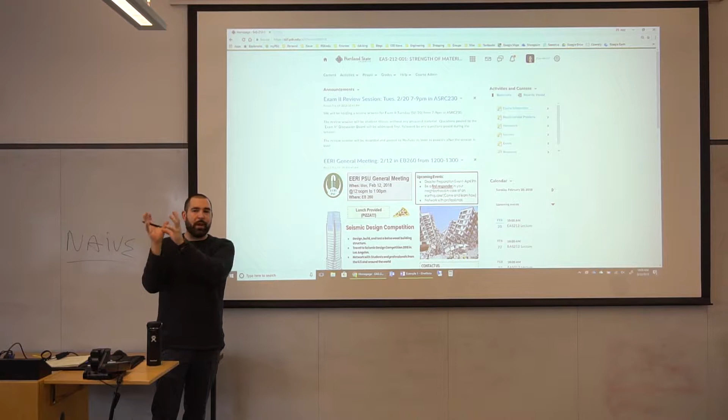Okay, so then beams 3, what were we starting to do in beams 3? Shear — so V and M diagrams, we dealt with the M, now we're dealing with the V. That's what we started with, this kind of long example where we've got a cross section subjected to just some internal shear.

Now, do you think there are many beams that only have shear acting on them? Can you think of any kind of beam where you'd have, at every location, just V and no M? What do you think? Horizontal and pin connected — so like pinned.

So something like this, is that what you're thinking, Dylan? What kind of load would we apply to it? Only a vertical load, so maybe a load like that. I'm still going to get shear, so my shear diagram is going to look like this. Am I going to get a moment as well? Yeah, my moment diagram is going to look like this.

There might be a couple instances where, based on the loading, we have a region of a beam with zero shear, but we'll never have the entire beam have zero shear—we could have regions of zero shear. We could have regions of zero moment, but for a beam subject to any actual loading, there's always going to be some moment, there's always going to be some shear.

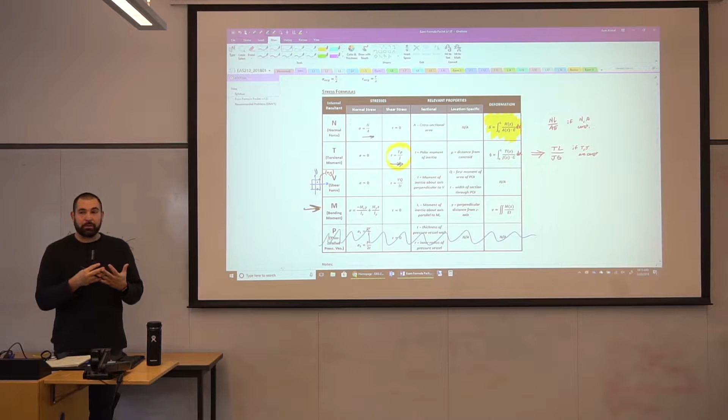And what's the other bit of geometry that we care about when calculating bending stresses? It's M times what over I? Yeah, y.

So whatever my point of interest is, I just need to be able to calculate the distance in the y direction. What's the y coordinate of that point? We can do that with a circle - either it's given to us, or the angle and the radius are given to us, but we can calculate the coordinate of a point on our circle. That's not a big deal.

So we can do moments, the bending stress is due to a moment on a circular cross-section. There's nothing keeping us from doing that. I think one of the recommended problems for this next chapter is going to give you a circular cross-section that you'll have to deal with, so you have all the tools to do that. Just because we've been doing mostly rectangular cross sections doesn't mean you don't have the tools to do it for a circle.

All right, the trickier one's going to be shear stress. So shear stress due to a shear force, what's my equation for that? Let's refresh our memory. Tau due to a shear force equals what? VQ over... right, the shear force times the first moment of area for our point of interest. We'll refresh our memory about that because we talked about it on Tuesday. The moment of inertia, we just talked about that - we know how to do that for a circle. And t.

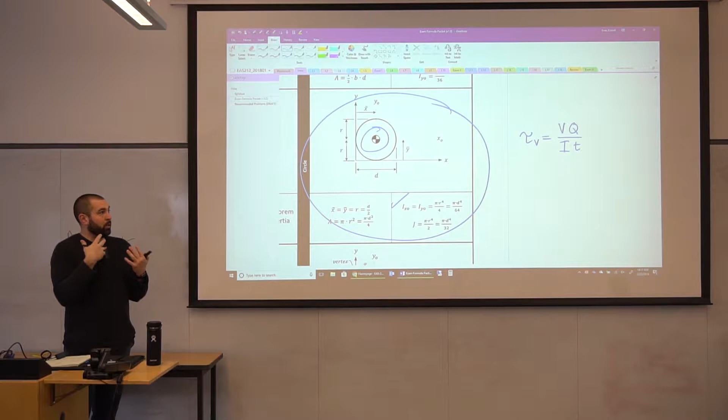Q and t get to be a little tricky when we're talking about points that aren't on the diameter or the top or bottom of the cross section. For a longer homework problem, not something that's going to be on the exam, I could potentially give you something like that. If we're looking at a circle like this, let's look at three different points of interest and figure out how we would deal with it. So here's my neutral axis for all of them. Assume that shear is going vertically downwards.

If my point of interest is the top, I'll just put the shear force on here to make it really clear - we're talking about shear force like this, like this, like this. If my point of interest is on the top, again, we know what V is, we can calculate I, we already talked about that. What is Q going to be at the top? It's 0. Why is it 0? Because if I check, the area above is 0.

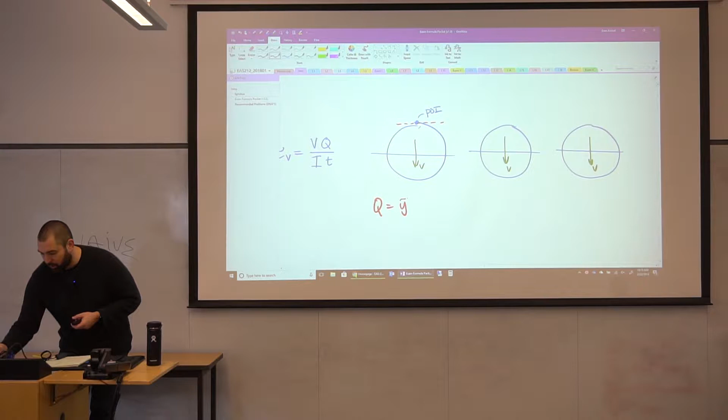If I were to make a cut or draw a line perpendicular to the shear, I'm going to get an area on top and an area on bottom, because Q is simply equal to y bar prime times A prime. This line separates A prime up above, or the option of A prime down below. If I choose all of the area above this point of interest, A prime is 0, right? Y bar prime would be some big number, but the area above that is 0, so that means 0 times some big number is just 0. If I chose everything below this line, A prime is going to be the entire area, right? So why isn't that going to be 0 for Q?

What is y bar prime? How would you describe y bar prime to somebody who's been in this class up until right before last lecture? It's the distance from the centroid of the entire shape to the centroid of A prime - the distance from the neutral axis of the cross section to the centroid of A prime. Inevitably, students are going to say, well, isn't this y bar prime for this area down here if I choose the area down below? And it's not, because it's the centroid of A prime, which would be right there, and the distance from here to the neutral axis is 0. That's why it doesn't matter whether we choose A prime above the point of interest or below - we get the same exact value for Q. In this case, Q is going to be 0 because either A prime is 0 or y bar prime equals 0, depending on which side you choose.

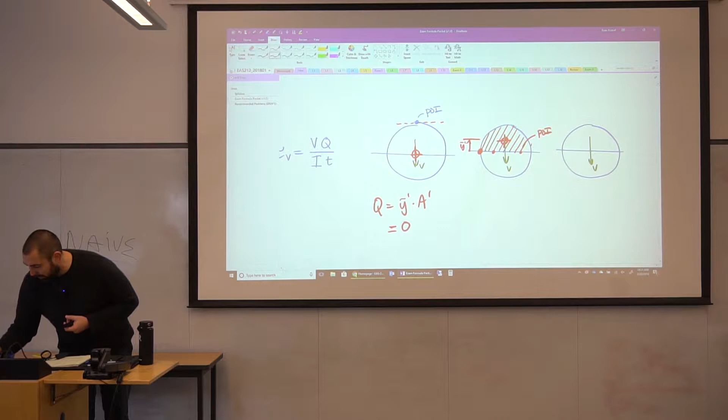But the other relatively easy one to deal with would be at the neutral axis itself. If my point of interest was on the neutral axis, it could be there or here, it doesn't matter, any of these being my point of interest, what is A prime going to look like? A semicircle. It's just going to be exactly a semicircle, either the top half of the circle or the bottom half. So it's going to look like this, and my centroid for that is going to be here, this is y bar prime, and this is A prime.

Now, I can't remember if I gave you that equation in the packet or not. Let's see if we can take a look real quick. Yeah, so for a half circle I would have to give you that information on an exam, like what is the area of a half circle. That's the easier part. And then what is the distance from the neutral axis to the centroid of that semicircle? I don't provide that on the note sheet, so I would give that to you as part of an exam problem. If I gave you that formula for the distance of the centroid and the area of a semicircle, most of you would know the area, but I'd give it to you anyway.

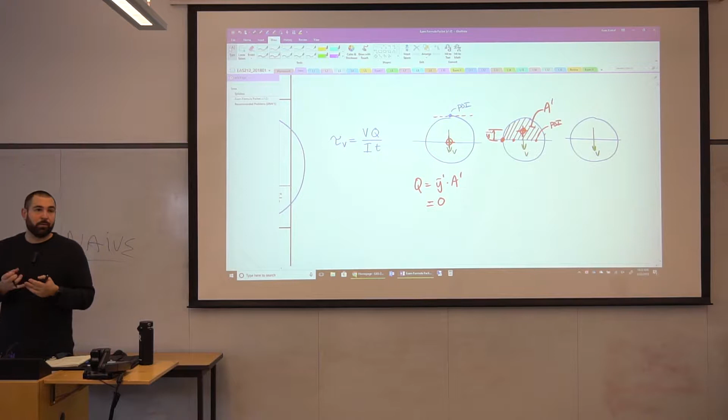If you knew that, then calculating Q for this would be relatively easy, right? It would be the distance from here to the centroid, I'd give you the formula, times this semicircular area. Same idea, so it would be fair game on an exam. I think one of the recommended problems has you doing that as well, but I would have to give you the equations for both the distance of the centroid and the area of the semicircle.

Now, what Musa was saying is, well what if we have a relatively difficult point of interest to deal with? Like this right here, if this was my point of interest, scenario number 3, that's where it gets to be a lot trickier. So here's a line perpendicular to V. If I choose everything up above, this would be my A prime area, and we would have a centroid and then some y bar prime value. This is a little bit trickier.

It's the same thing where we can get a table or a diagram that would tell us, maybe it's defined by the angle of this point relative to the horizontal, maybe you're just given a vertical distance. There are tools that, if I give it to you on a homework assignment, can help figure out what this area is and what that centroidal distance is. And I would provide those to you. That wouldn't be something I give you on an exam. That would be something we'd reserve for a homework problem or something like that.

But this, obviously, no calculations required, I would expect you to know this on an exam. This, if I gave you the equations for the area and the location of the centroid, would be fair game for an exam, and you will see it on a recommended problem. This one, not so much. I wouldn't expect you to do that on an exam, even though I would expect that many of you would be able to figure it out.

Max asked, wouldn't it be easier to just define a function that would allow you to move the point of interest to any y distance? And so that's what the formula that I would give you basically does.

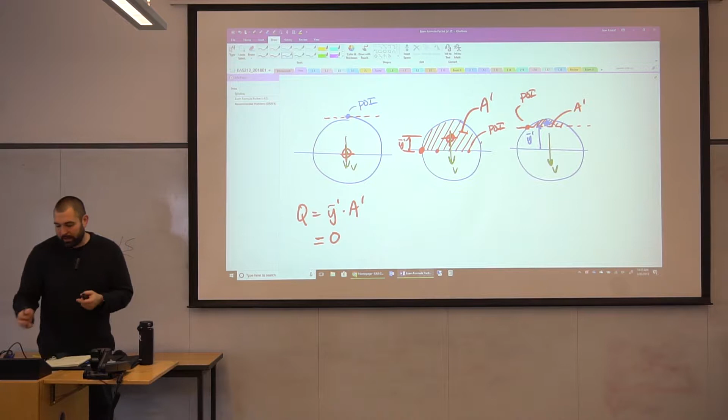But scenario 1, scenario 2, absolutely fair game. So for a circular cross section, it's a great tool to use: throw all of the loading at you, N, V, T, M, and see what the overall stress picture is at a given point. That's what chapter 8.2 is all about, which is the subject of today's lecture. We're going to wrap up shear a little bit, but then talk about what is the total picture of stress at a given point, and whether all of your stresses due to N, T, M, and V add to each other.

Let's get to our table really quick. If I had a circular cross section with an internal normal force, internal torsional moment, internal shear force, and internal bending moment, do all of those stresses add up? Do you just add the values all together? What do you think?

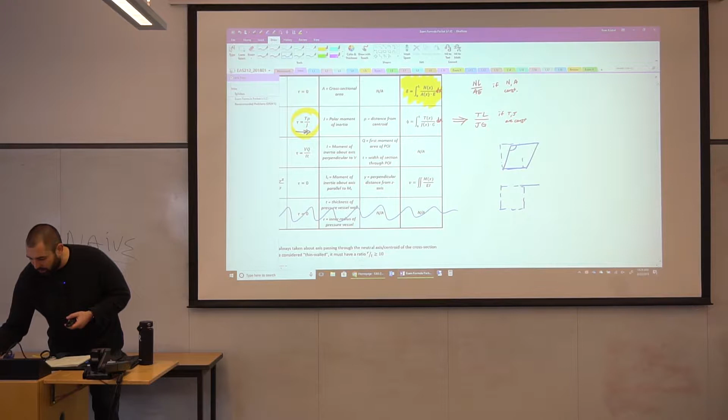The fundamental nature of shear stress and normal stress is completely different. Shear stress is trying to cause right angles to change their angles, changing the angle of each corner of a differential element, whereas normal stress is trying to change the volume of that element. They're doing fundamentally different things. So right off the bat, I know shear stresses and normal stresses are going to be kept separate in terms of how they act on that differential element. We'll see how they flow into each other a bit later, but for this material, shear stress is shear stress, normal stress is normal stress—they don't really intermingle at all.

So right off the bat, I know that the stresses from my normal forces are not going to be added to or subtracted from the stresses from my shear stress due to a torsional moment. But what about the stresses due to a normal force and the stresses due to a bending moment? Are those going to interact with each other? What do you think?

If I was looking at a cross section and I was going to cut a beam, here's my section cut. Let's pretend this has a bending moment applied to it and a normal force applied to it. We didn't quite get to this last time, but we will get to it in more detail right now—bending moment and a normal force. If I were to plot out the stresses due to the normal force, what does it look like? How does the normal stress due to a normal force vary from the top to the bottom of this cross section?

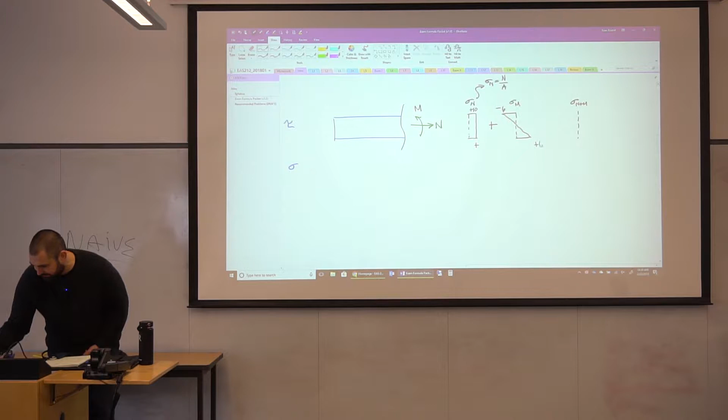I have a positive number here, a negative number here. They counteract each other to some extent. Let's put some numbers on here. I'll say 10 here due to the normal force, negative 6 here due to the bending moment, and positive 6 down at the bottom. It's still going to be positive, but just a net of 4 at the top.

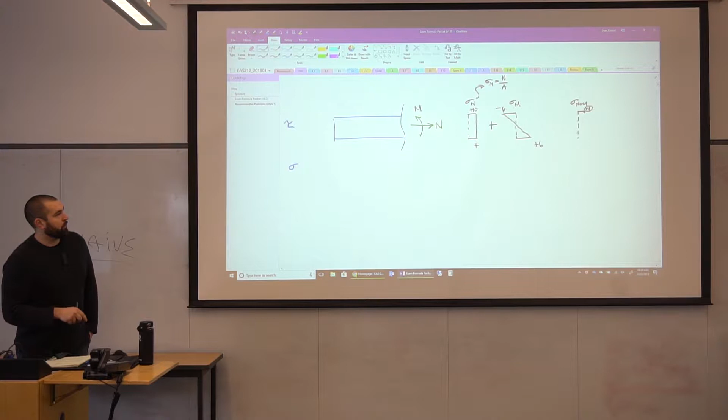So what about at the bottom? I get positive 10 plus positive 6, I get positive 16. I just add the results together.

This is just like what we did with bending moments where we had a Mz and a My. You could look at them completely separately, treat each like a standalone single axis bending moment, then add it to the results from the other moment, just treating it like one moment acting at a time. Then we just add the results at the end.

So that's what we're going to do with normal stresses: figure out, at the extreme locations, what are the values due to normal force and due to bending moment, just add them together. This is one possible distribution we could get. In this case, the effective neutral axis isn't even on the member itself, it would be up here where it would actually pass through zero. We get some interesting behavior with that, but it could potentially look something like this too, where we've moved the effective neutral axis up as well.

This happens all the time. These columns here are primarily axial members, but they get bending moment when there's an earthquake, a big wind gust, stuff like that. These are acting as what we call beam columns. Some of it's going to be stress due to the normal force, like the weight of the building, and some of it's going to be the moment due to a lateral force being applied to it.

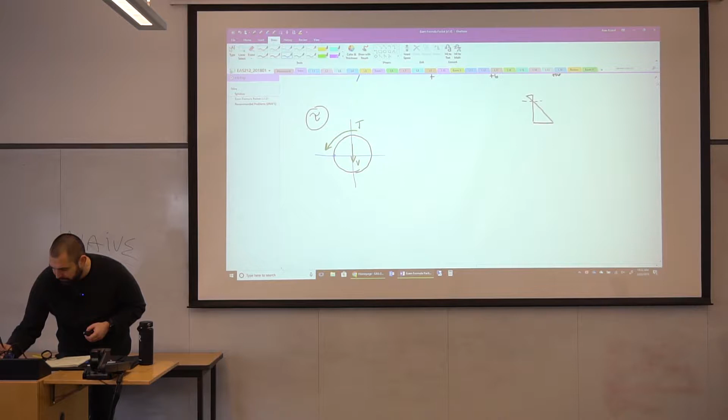we're talking about shear stress now. If I was dealing with a circular cross-section with a shear applied to it and a torsional moment applied to it, let me draw some axes on here really quick, and label a couple different points: A, B, C, and D. If I wanted to look at the shear stress due to both of these internal loadings combined,

I need to do the same thing: wherever they both act at the same location, add them together. But there's a wrinkle with this, because the directionality of the shear stress for a shear force is going to be parallel to the shear force. So at A, B, C, and D, the shear stress just due to the shear force is going in what direction? What direction is V going?

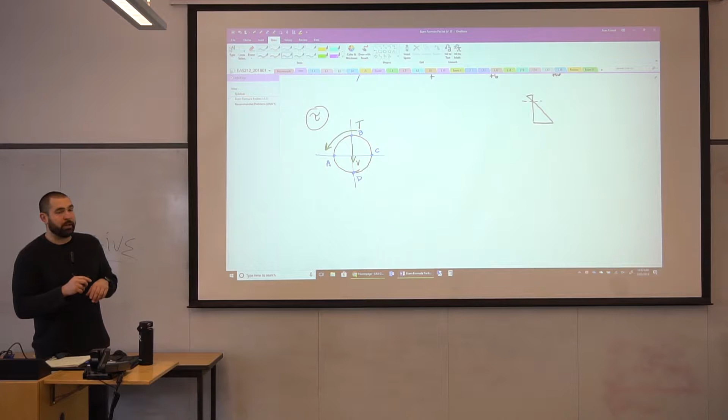Downwards. So let's just break this up: say this is equal to just the effects of the shear force plus just the effects of the torsional moment. Here's the shear force V, here's the torsional moment T, and if I was looking at those same points, let's zoom in a little bit. At point A, I'll show the section facing side of that differential element. This is a 3D element, but we're only looking at the front face, and we'll do the same thing at point B.

We'll show an exaggerated one at each of these cardinal points, and the shear stress is going to be going downwards at every location. Now, I've only drawn it at this point here, at A and at C. And why have I done that?

What's my shear stress going to be up here? Zero, right? VQ over IT, Q equals 0 up at the top. So if I was looking at a point intermediate, let's add an extra point. We'll call it point E.

That shear stress at point E is going to be less than the shear stress at A or C. Let me say that one more time. Because tau equals VQ over IT, the shear stress due to this shear force at B and at D have to be 0. That's where Q equals 0. We already talked about that.

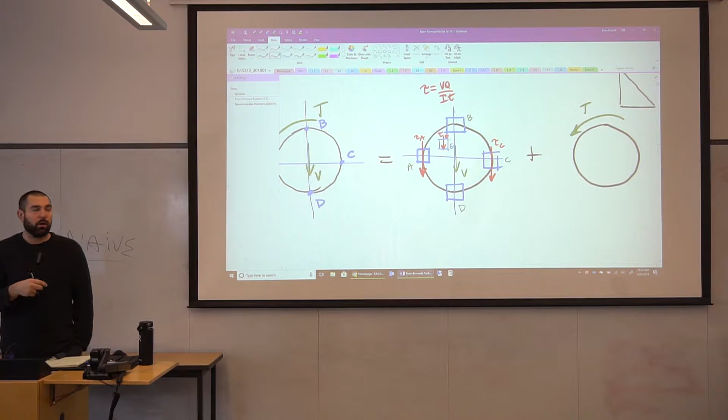Is that going to be the same case for T? What is my equation for the shear stress due to a torsional moment? It's been a while, but it's relevant for the exam on Tuesday as well.

Equals T times, I'll give you that, times something divided by something. T times rho—you can call it C if we're talking about the extreme fiber, like the outer radius—and then divided by J, exactly right, the polar moment of inertia.

But these equations, just like over here, don't tell us exactly what direction those shear stresses are going to be. This equation tells me that the further away I am from the neutral axis, the larger the magnitude is going to be.

So that's helpful. I'm going to look at those same points: A, B, C, and D. We'll even do this intermediate location too, that's a little trickier to deal with. Let's not worry about it quite yet—let's just talk about A, B, C, and D.

Do we always cut horizontally from the point? Cut horizontally from the point—so do you mean the direction of this box? At point A, if I make a cut, it's always going to be horizontal, like there won't be vertical cuts. Are you talking about this box, or just this line right here?

That entire line—oh yeah, so this line just means the neutral axis. It's not really a section cut at all. This is just recognizing the vertical and horizontal axis through the center of the shape. We're not really making a section cut. This box is a differential element kind of cut out of the shape, but don't think of it as a cut. I'm just using these as guides to show the horizontal and vertical axis. That's really all I'm showing.

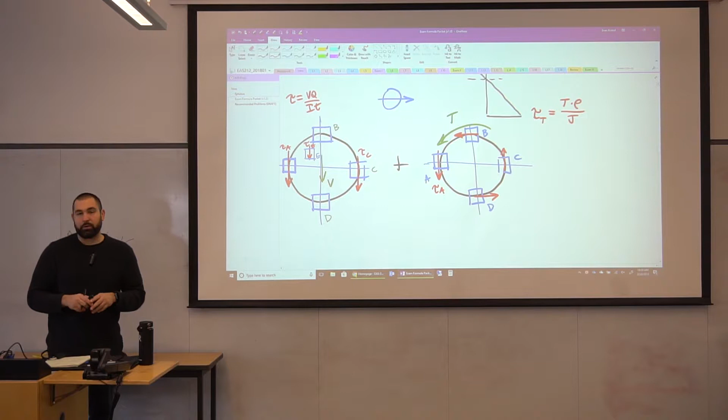Am I going to have zero stress up there just like I had zero stress up here? No. What direction is it going to go at B? To the left. Being consistent with the torque, this is going to be the direction of each of those shear stresses, same direction as T. It's the same kind of idea.

I'm actually going to do an intermediate point right here, I'll call it point E. This one I drew off to the left a little bit. I just want to clean this up to avoid some confusion. Here, it would be going downwards as well. We're just going to have some intermediate point E that's on the vertical axis.

So for this point E, what direction is my shear stress going to be going? Also going to be going left, but what's different about E and B? The magnitude. Why is the magnitude at E less than the magnitude at B? Rho's different, right? So I will have some smaller shear stress, and again there's a linear relationship with distance and the magnitude of the shear stress.

Okay, so now we're starting to visualize how these shear stresses are acting on these differential elements aligned with the cross-sectional face. And so the question is, if I'm adding these together, how do I deal with that?

So here at A, it's relatively easy, right? I have some shear stress here due to the shear force. I have some shear stress here due to the torque. And what's easy about this is that they're both going in the same direction. So let's go ahead and draw out what this is going to look like.

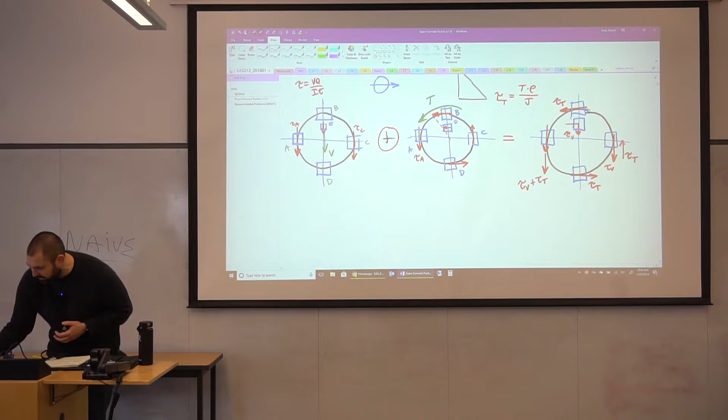And then down at the bottom, we can see that we would only get just the shear stress due to the torque. What about point E? Point E is the trickier one, right? At point E, we have some shear stress going downwards due to the shear force, and we have some shear stress going to the left due to the torque.

How do I deal with that? We could do a vector sum and give the total magnitude. That would be great. Or you can just say, look, this much to the left, this much going downwards, and that would be fine as well too.

But you cannot add them together algebraically. You'd have to do vector addition, Pythagorean theorem, a squared plus b squared square root. That would give you the magnitude of the resultant. But you can't just say, oh, the shear stress due to the torque is 5 ksi, and the shear stress due to the shear force is 10 ksi, so the total is 15. That's not the case because they are acting orthogonal.

So that's a tricky one, a conceptual kind of hiccup, but I think that visualizing what direction the shear stresses are going on the face is really important, and figuring out when can I add them together, when do they counteract each other, when is only one of them acting at a time. That's an important conceptual thing to be able to understand.

So questions about this, how we're adding them together? Yeah, Dylan.

Sure, that's fine. So are beams or other structures ever designed to have torque or shear in the opposite direction that an earthquake will cause?

Well, the tricky thing about earthquakes is that they're cyclical, so it's almost impossible to get different behavior in one direction versus the other. When we do structural analysis for seismic events, we almost always get the plus or minus value of stress, moment, or axial force due to the earthquake. We have to say, okay, here's our dead load, and then we add 10 kips for seismic, or subtract 10 kips for seismic. Same thing with shear, same thing with torsion. It's very uncommon to design things to have a non-symmetric response to an earthquake. I haven't worked on anything that does. I could imagine maybe there would be some structures where you might do that, but almost all the time we just basically add the seismic effects or subtract them. That's almost always how we deal with them. Does that answer your question?

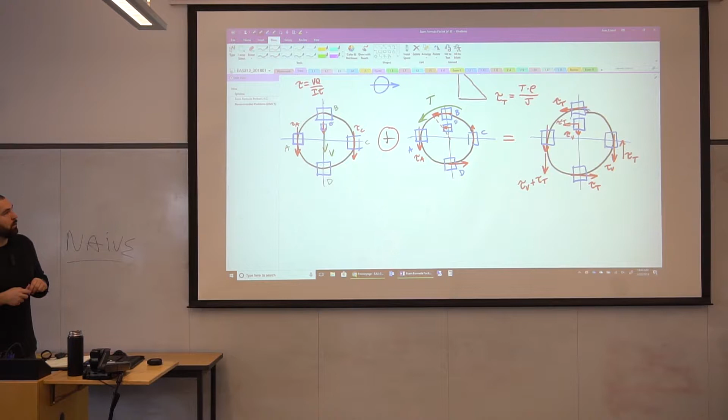Yeah, Max? Is the distribution of stress due to the bending moment in that diagram implying it's linear, or would it end up being second order? Which one are you talking about, down here? Yeah, so this would be just a torsional moment. This has a linear relationship because rho is the only property that matters, and rho increases linearly as we go out to the further distance from the centroid. So this is a linear distribution. Does that answer it? Okay, great.

Okay, so let's take a step back. This is the big picture of what we're going to be talking about today. I want to get through the rest of the example talking about shear stress, because Q inevitably is going to throw everybody for a loop at some point. So I want to go back and make sure we really understand what we're talking about when calculating Q - Q being the first moment of area on either side of the point of interest. Let's go back to that example from lecture 9 and refresh our memory. We'll get through most of this, take a break, and then transition over to combined loading.

So we have a singly symmetric cross section - an unbalanced I-beam where the top flange is wider than the bottom flange. This is a common design practice to have it unbalanced, because we might have bridges or buildings that mostly see a positive moment, meaning most of the compression is up at the top. We don't get a lot of compression down below. So based on the stress profile, we can tailor our cross section to meet that stress profile. This is pretty common - it just makes it a little more difficult to calculate Q and to calculate I.

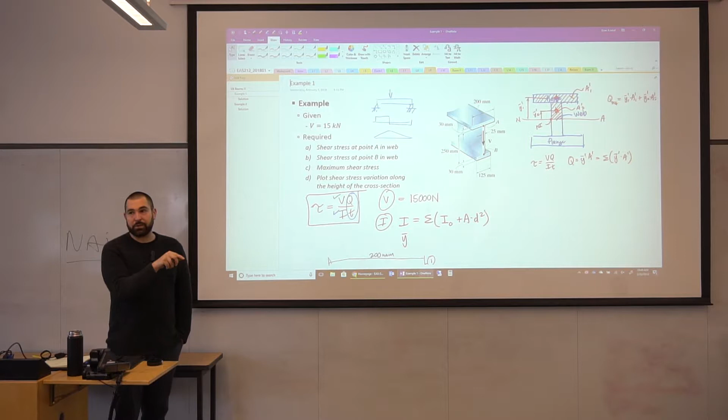D is the distance from the overall centroid of the cross section, which you've already calculated as the y bar value. We also call this the neutral axis for our purposes. D is the distance from that location to the centroid of each individual area. So from the neutral axis up to the centroid of the top flange, that's D for shape 1. We do that for each shape, square it, multiply by the area, and that's how we get the total moment of inertia.

We couldn't do any tricks with this shape, like breaking it into two shapes with the same centroid to avoid an A D squared term. This is one where we really have to look at it and have a non-zero value for all six terms. Because we have three different shapes, each gets two terms.

That's moment of inertia, and we have videos online that can help with that too. Shear is given to us in this problem, and we talked about I. So the two things we need to talk about are Q and T. Q has a formula: Q equals y bar prime times A prime. Y bar prime is the distance from the neutral axis to the centroid of the A prime area, and A prime is the area on either side of the point of interest.

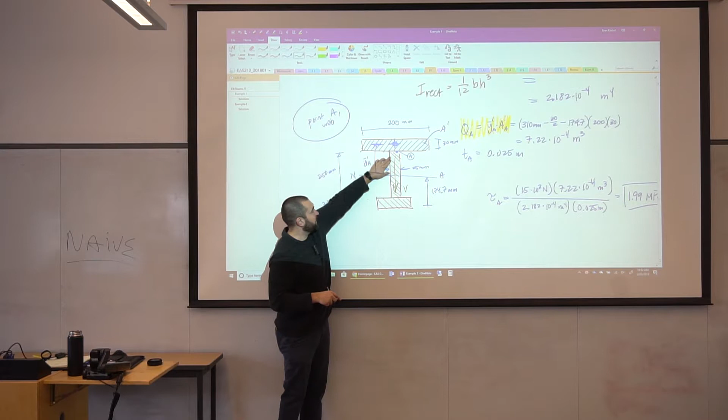Above, because I only have one rectangle — this is another common conceptual issue I see. Some students, when they choose everything below, say you only have this rectangle here to deal with. What's wrong about that? They say all they have to deal with if they choose everything below is just this here.

No — it's everything below, even stuff past the neutral axis. It's this inverted T shape, the entire rest of the shape below that point of interest. A lot of students cut it short, and that's not the right way to do it. You need to consider everything above or everything below.

It's a similar conceptual issue with section cuts. A lot of times students take a section cut and then only keep some of what's on one side of that cut, whereas you need to keep everything, including reactions, forces, and geometry.

With that in mind, if I keep everything up above, I need to calculate the area A prime for rectangles — that's super simple. If we were dealing with a circle, I would give you a formula for calculating the area above a specific point, which is something between a semicircle and zero. But we're mostly dealing with triangles, rectangles, stuff like that — area is pretty easy, and the centroid of that area for simple shapes is also relatively easy.

For rectangles, it's half the height. For triangles, it's one-third of the height from the wide portion. You can look that up in the table in your formula packet too. Either way, y bar prime is to the centroid of the area. Inevitably, I'll see people say y is just the distance to the point of interest.

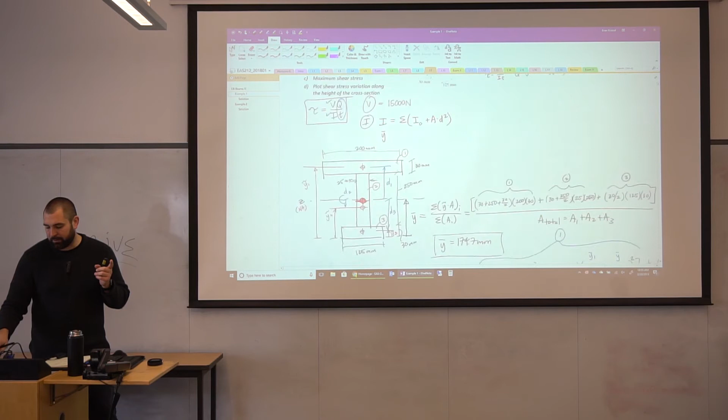At point A, do I use 200 or do I use 25? There's a hint in the problem statement that tells us which one to use, and we'll talk about that, then also talk about what if it wasn't specific. So what about the problem statement for sub-requirement A tells us that we need to use the 25 millimeter width?

Web, right? We talked about this—the vertical component parallel to the shear force is called the web. Even if we had a box section like this, it's the same thing. If V was going down this way, the vertical components parallel to V, both of these collectively would be called the web, or the webs. So here it says the shear stress at point A in the web. The web is the narrow vertical component, which means the narrow component with the 25 millimeter width.

What if it just said give me the shear stress at point A, and omitted the 'in web' component of that request? What would you do? You would just give the answer for both. Because at that point, it jumps immediately from some small value to a larger value as we go from the top down. As we go from the top down, we start at 0, it increases, and there's kind of a parabolic shape to that increase.

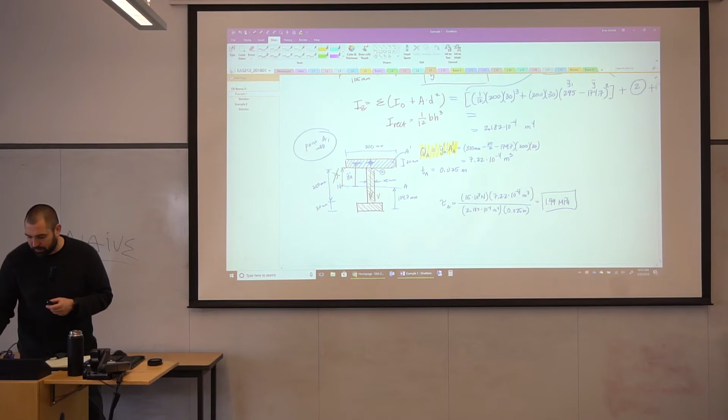As soon as we get to A and jump across that interface from flange to web, T drops down quite a bit—it goes from 200 to 25, right? So we're talking about a factor of 8 decreasing, and the stress is increasing immediately by a factor of 8 there. I think we've plotted out for this shape what the shear stress distribution looks like—actually maybe that was just in the lecture itself.

This is the kind of shear stress distribution we'll get: 0 at the top because Q equals 0, 0 at the bottom because Q equals 0. The maximum value occurs at the neutral axis because there I have Q max and T min at the same point. But at the interface between the flange and the web, we have a discontinuity where it jumps up by a factor of whatever the ratio of flange width to web width is. So if it's not clear—if it just says at this point right here, and it could be in the flange or the web—just give both values to be sure. But keep in mind it is transitioning immediately at that point.

Okay, back to the example. The only other thing I want to talk about with respect to this example is the maximum shear stress. The process for the shear stress at point B is exactly the same as it was for point A. We draw a line perpendicular to V, and then choose everything above or everything below that line for A prime. For point B, do you want to keep everything below for A prime, or everything above? Probably below—it won't change your final answer, but I think it makes more sense to use this for your A prime of point B area. But you'll get the exact same answer if you choose the T shape up above. Other than that, it's the same exact procedure as for point A.

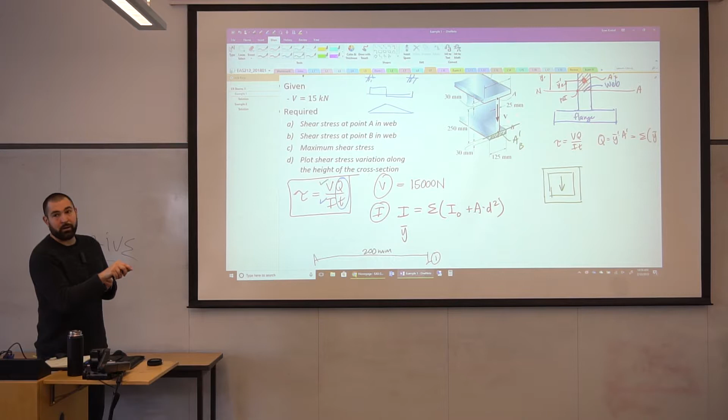And we do, because here we found out that the distance of the neutral axis is around 100 or 100 and something millimeters. Either way, it's in the web, and everywhere in the web I have T min, so I know that at the neutral axis is where we care about for the maximum shear stress.

And all that I want to talk about for this is what does Q look like for that calculation. So here we'll call it tau max, and we know it's going to be at the neutral axis because we have Q max and T min at the same time. Okay, so let's get to that subpart right there.

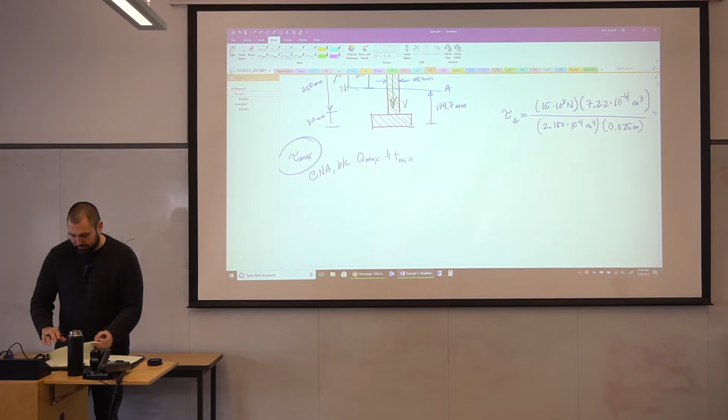So I'm just going to choose everything above the neutral axis for this. We know the distance from the bottom of the shape to the neutral axis, and then so I can split it here, then keep everything above the T shape up here, or keep everything below the T shape down below. It doesn't really make a difference either way. And so I'm going to make a new diagram that has the top flange and it has the portion of the web up until the neutral axis, because that's where my point of interest is.

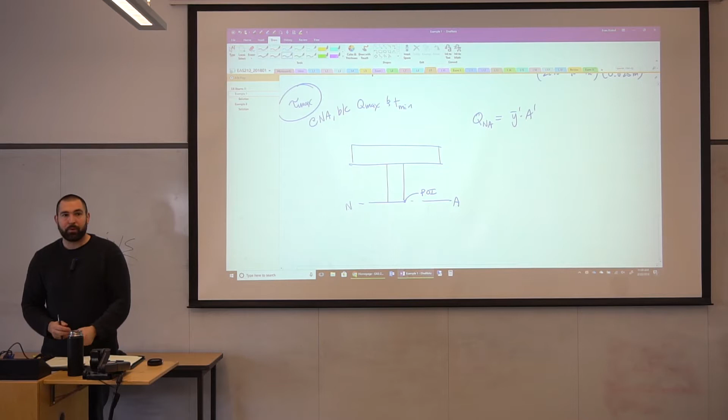Here's my point of interest. And so I've drawn basically a line through the point of interest, which is coincident with the neutral axis, and now everything above is what I'm going to use for Q. So Q at the neutral axis is the same equation as Q for anywhere else. It is y bar prime times A prime. But here, I'm really looking at two different discrete shapes. We've got a top flange and we've got a portion of the web.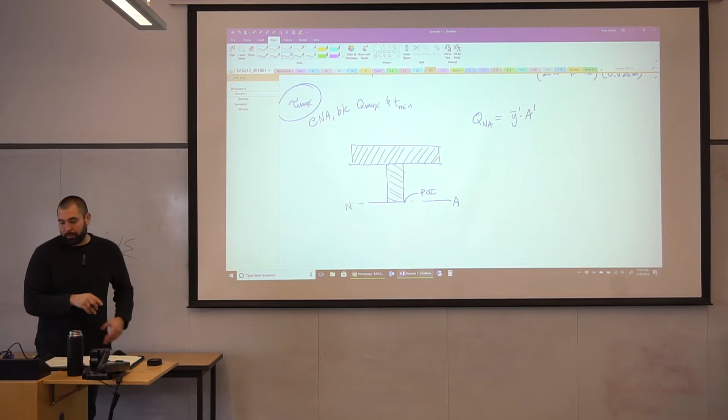You could find the total area for both of these shapes combined, and you could find the centroid of both of them combined, because as it stands right now, they each have their own local centroid, but there's also an overall centroid for these as well too. So if this is y bar prime, we'll just call it total, we could find the actual centroid of both these shapes combined. I'll call it y bar prime total, and then multiply it times the total area. So I could just say this is y bar prime total times a prime total.

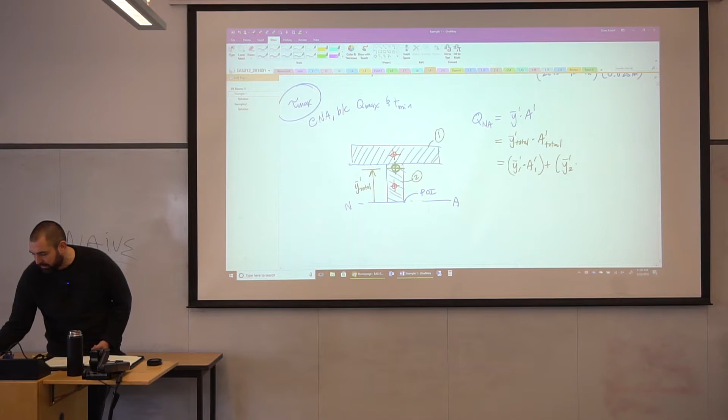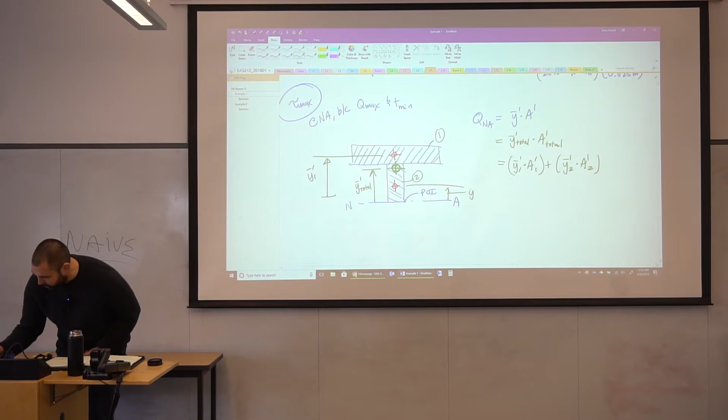But that's a pain. I don't want to have to figure out the centroid of these if I don't have to. And fortunately, you don't have to, because all you would have to do, if this is shape 1, if this is shape 2, all that you would have to do is y bar prime for shape 1 times a prime of shape 1, plus y bar prime of shape 2 times a prime of shape 2. You don't need to go through the intermediate step of calculating the overall centroid, because this equation here, this is y bar prime 1, and this here is y bar prime 2. You can just do them individually, add them together, there's no difference.

So just trying to save you some work. Either way works, but here you have some intermediate calculations to calculate y bar prime total and a prime total, which is kind of a pain. Okay, so any questions about this? We're just making the shape for a prime a little bit more complex, but we can again do the same thing of dividing and conquering that as well too.

And we've already talked about subpart D, which is what is the shape of the shear stress diagram. We talked about that in the lecture slides itself, and that is, it's going to look exactly like this.

So one question I do have, and this is more conceptual, this isn't something that I'm necessarily going to put on an exam, but how could I get, like, what is the relationship between V and the area of this shear stress diagram?

Or in other words, when we were looking at bending stresses and we knew what the stress distribution was for the top flange and the bottom flange, we could calculate how much force each of those individual elements were exhibiting just by multiplying the stress times the area, the average stress times the area.

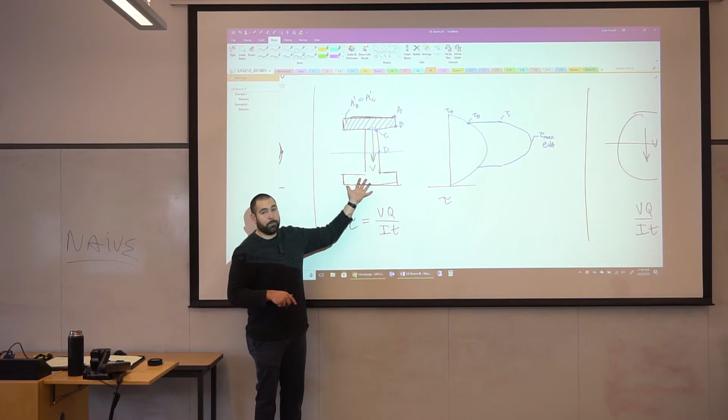It's the same thing here. If you think of this as a 3D stress distribution, if I were to take these distances and plot them out on top of this shape, coming out of the page, with this being the side view and this the front view, combining these into a three-dimensional representation of the stresses, that volume altogether has a length in and out of the page in terms of KSI, and the projection on the cross section would be inches squared. If you took the volume, that's KSI times inches squared, which would be kips, and that would be equal to this shear force exactly.

So think of it that way: if we were to plot out the stress profile onto the face of the cross section, making a 3D element out of it, the depth in and out of the page is like stress. On the page itself, the cross section, we're looking at area. Multiply those together, get the volume. That is the actual resultant force, whether it's a shear force or a moment, anything like that. That's a good way to think about it, maybe in a more spatial way.

All right, any wrap-up questions about how we go about the process of going through a shear stress calculation?

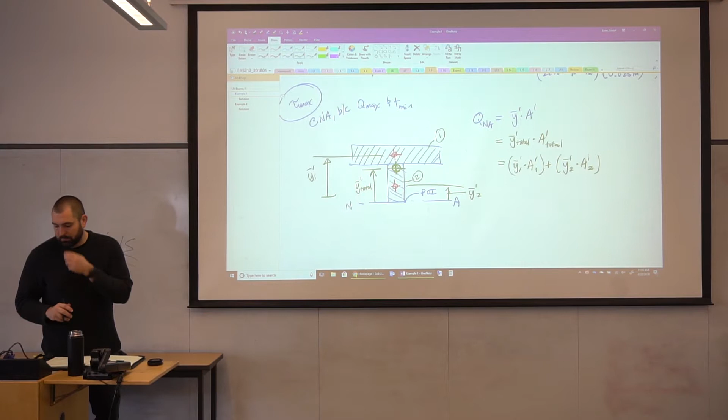Yeah, Max, I just wanted to clarify, when calculating Q at the neutral axis, you're doing the summation of y-bar prime times A prime for the total, or A prime for each? So A prime 1 would be the area just of shape 1, and A prime 2 would be the area just of shape 2. A prime total is simply equal to A prime 1 plus A prime 2. But if you're breaking it up with separate y-bar primes, it's just times the area of shape 1, area of shape 2.

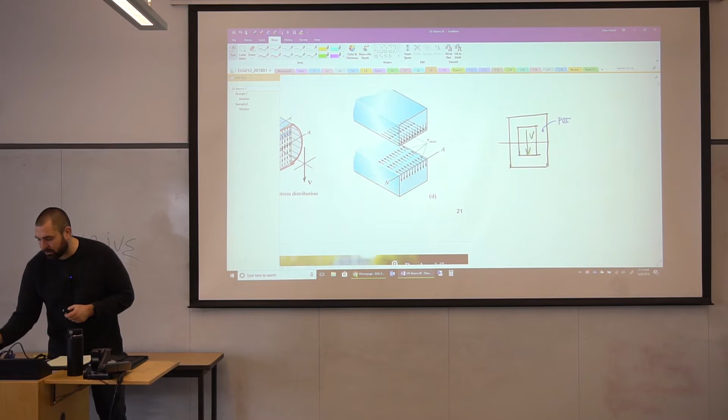The other question that came up over the break that I thought was good is, well, what if I have a box section like this? I'm still trying to calculate the shear stress at my point of interest, but if tau equals VQ over IT, what could maybe throw you for a loop if we're looking at this point of interest?

Right, I'm still going to do the same thing for A prime. I'll draw a line perpendicular to V. I can choose all the area above or below. So even though A prime now is like either one positive shape and one negative shape, or you could look at it as 3 individual positive shapes, calculating Q is not really going to throw us for a loop. But T, yeah.

So is T going to be this width, or both of them combined?

It's going to be both combined. It is the width of the cross section at the point of interest, and the width is the combined width all the way.

One of the sections that we're skipping has to do with what's called shear flow, which would be, well, what if I was putting nails in to attach, or welding, like this point here and this point here?

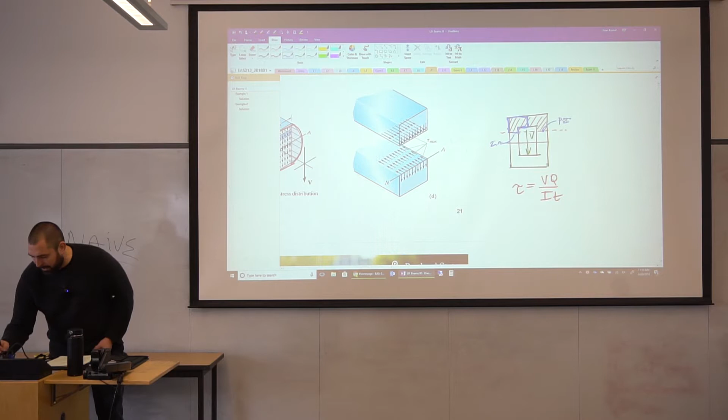Oftentimes what we would do is we would kind of cut this area in half. If I were to simply cut this area in half and say half of this area is being held on by this interface down here, let's just call it 2 inches. And then the other half of the area is being held on by this other interface on the right-hand side, that's also 2 inches wide.

If I choose T to be 2 inches, it all works out in the wash, because my A prime area associated with this width is half as much. So I can either do the total area with a width connected of 4 inches, or I could do half of the area with a width connected of 2 inches. And because one is in the numerator, the other is in the denominator, the ratio is the same.

But if you're doing the total area, it would be the total width, even if there's gaps in it. Whatever width crosses that line that you draw perpendicular to V, all of that combined is T. All right, any follow-up questions about that?

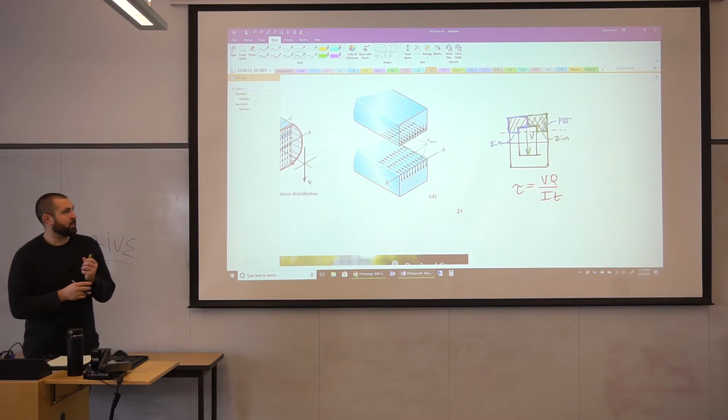Okay, so let's talk about just really quickly the things that we're skipping over that I'm going to provide some extra credit for. Beams 4 talks about shear flow, and I just alluded to it a second ago. I just want to give you a 5-minute synopsis of it.

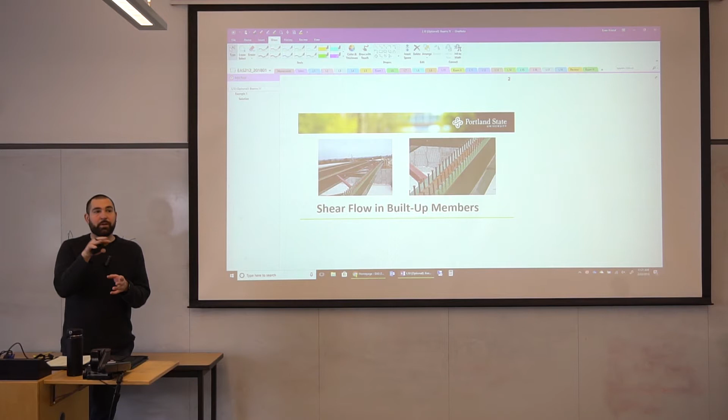When we build a cross section, it is very common to have it made up of different materials or different parts that are attached at some point. If you're familiar with residential framing, a lot of the floor joists nowadays have a fir top piece to deal with moment, an oriented strand board, kind of a crappy plywood web, and then at the bottom a higher quality fir bottom flange. These are attached either by some combination of glue or nailing, maybe one or the other. But the point is they're attached to each other.

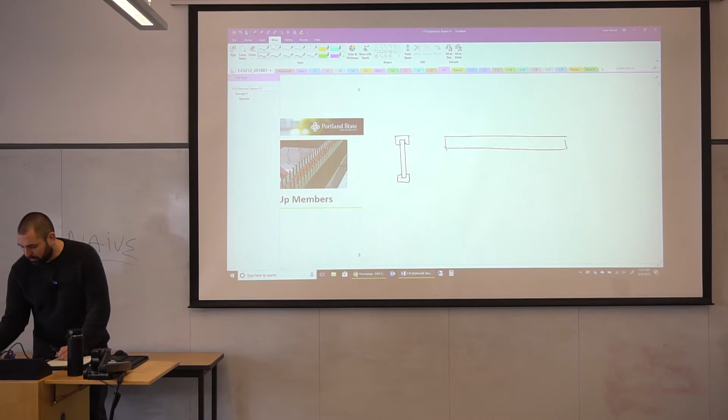Now, if this was a beam that I was trying to design to carry some sort of distributed load, point load, whatever else, it's going to be subjected to a shear force and a bending moment. When we usually think about the shear stress on this, we're often conceptualizing just the shear stress on this cross-sectional face, like the shear stress going up or down.

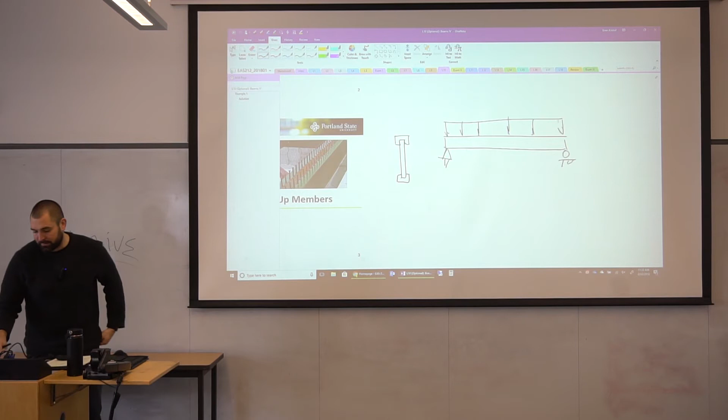But due to the complementary property of shear, what other direction is the shear stress going? Yeah, in and out of the page. And what that does is it creates a force in and out of the page that's differential on this element and the element that is connected to it. So as I apply a shear force to this, that web is going to want to move longitudinally versus that top flange. You can see this in practice easily by looking at—where to go?

We've got a nice example of this, and it might even be in lecture 9. Let me just jump back, because I think it's valuable to see—as soon as you see it, you're going to say, oh yeah, I get that intuitively, that makes sense.

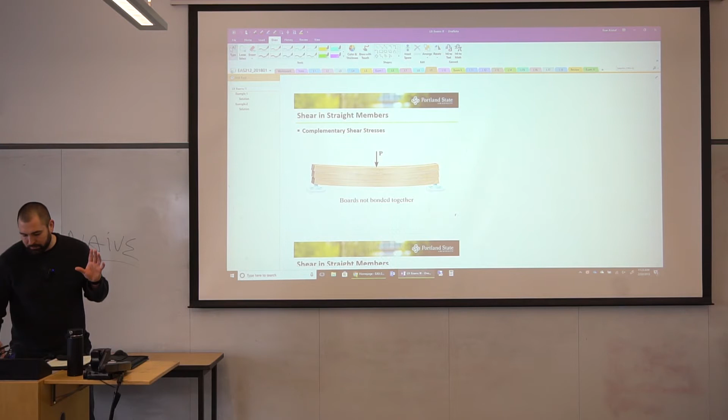If we have 3 boards stacked on top of each other, think of them as frictionless boards. If they start out exactly the same length, perfectly stacked on top of each other, they're just going to look like one big rectangle, and all of the ends will line up and everything's perfectly square. As soon as I put a load on top of them, what happens at the ends?

They slide relative to each other. That is caused by a longitudinal shear stress. It's about each of these acting as independent beams where the top gets shorter, the bottom gets longer, and that difference, if these are free to slide relative to each other, is a longitudinal shear stress causing that.

Now, if we don't want that to happen, it's for good reason—we get a lot better structural performance if, instead of being 3 individual separate beams, these all act together as one cohesive cross-section. Because here, if I were to calculate the moment of inertia of this, it would just be the moment of inertia of this, plus the moment of inertia of this, plus the moment of inertia of that.

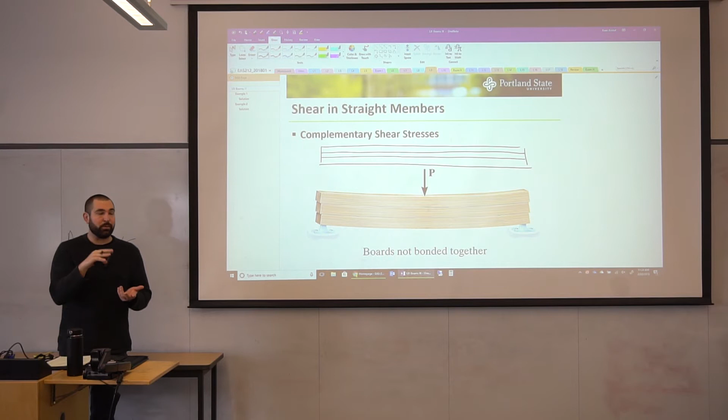No AD squared term at all, just 3 times 1/12 base times height cubed. But if we attach them, if we bond them, then all of the ends still line up. If we were to glue all of these together, all the ends line up, and now they act as one complete cross-section, and we get beam action where the moment of inertia now is not just 3 times the moment of inertia of one of them, it's a lot bigger than that. It has that AD squared term value now.

Now the difference is that we have glue here, but the question you're going to have is: how strong does that glue need to be? Or if we're nailing this at multiple different locations, what is the demand on that nail, or how many nails do I need to put in there?

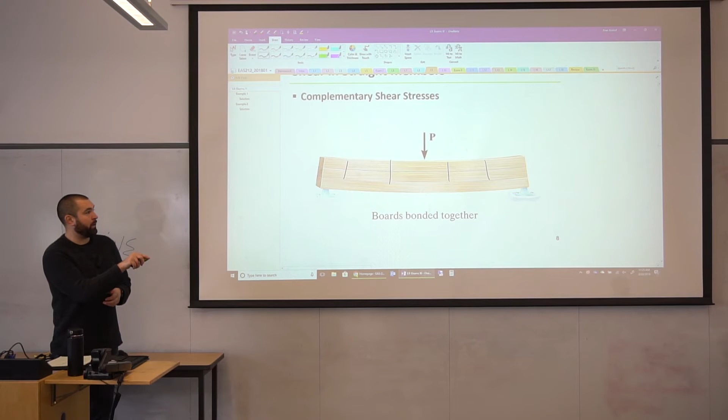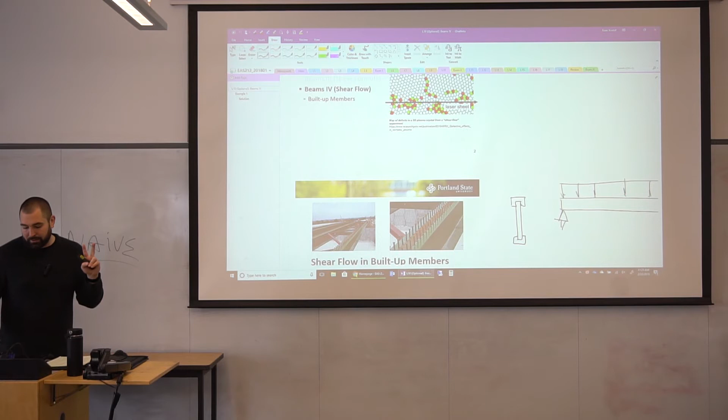That's fundamentally still a shear stress investigation, but we call it shear flow, and there are some specific applications of it, whether we're talking about glue or discrete fasteners like nails or staples or welds. But the reason we're going to skip over this is, number one, I never learned this in my strength of materials class - I learned it in my design classes later on, which is generally when it comes to the forefront. And two, because the equation is so similar to what we've already done for shear stress itself.

Shear flow, for whatever reason, Hibbeler calls it lowercase q. So now we deal with q and Q, which is kind of a pain, but we can deal with it. Lowercase q is called shear flow, and it's equal to V times Q over I. What's missing? T. So what are my units going to be here?

If I'm missing a linear dimension in the denominator, instead of being like kips per square inch, what am I going to get? Kips per inch. Which means this will give me the demand in terms of force per foot in and out of the page, or force per meter in and out of the page that I have to resist. And so that's the difference about shear flow - we're clearly talking about the forces in and out of the page, longitudinal to the beam.

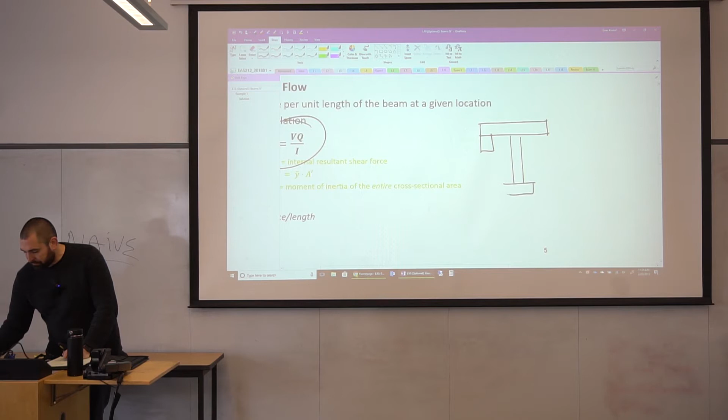Now Q is just very slightly different, because when we talk about a cross section, we're focusing on how many points of attachment there are. So if I had a cross section that looked like this, with 5 different rectangles - I've added some little stubs here to maybe increase the moment of inertia - we're focusing on just putting nails in between all of these here. If I want to know what the shear flow is along this interface right here, my A prime area, Q is still calculated the same, Y bar prime times A prime, but A prime now is the area that is attached to the rest of the cross section.

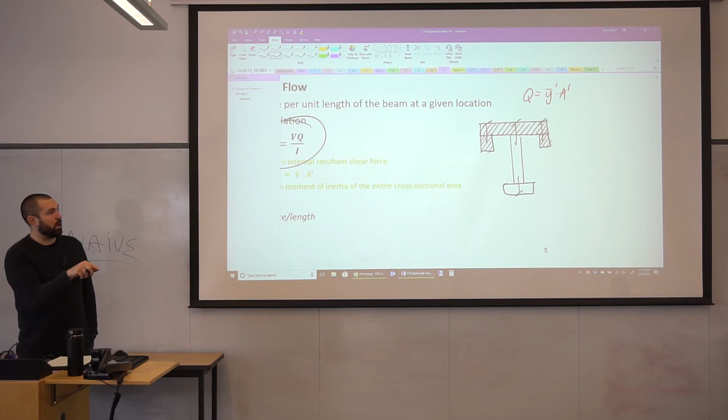Meaning I can either choose everything on either side of this joint. Now, when I say everything on either side of that joint, I mean everything attached to it on either side, which is a little bit different. If I choose everything above, it's not only going to be just this top flange, it's also going to include these little stubs as well. It's everything on either side. Whereas if we're doing the shear stress at this point, I would do a horizontal line. With shear flow, all that I'm doing is saying everything on one side or the other of this, and you just follow how everything's connected to each other.

The other trick about this is: what if we had 2 different points of attachment, like the top here? If I was interested in figuring out what is the demand on this interface, the nailing between this stub and the rest of the top flange, I could either choose this area right there for A prime, or I could choose this area over here for A prime, but then divide it by the 2 different points of attachment. So this is a little bit of extra bookkeeping, but fundamentally Q is calculated essentially the same way.

A prime is just slightly different, and then you have to keep track of how many points are attaching - that helps you define A prime. So it's really just a slight extension of VQ over IT, which is why you have the tools to be able to do this. Just a couple tweaks to the methodology, and then you'd be completely well versed in it.

So we're going to skip over this, but it does help when it comes to attaching different pieces and figuring out what is that demand. Dylan asks: if it was only attached at that center piece and those little edge squares were already there and didn't need nails, would you still include them? Yes, you would still include them. So if this is all monolithic top flange, with no other pieces attached, you would still include the entire top flange for the shear flow at that web to flange connection.

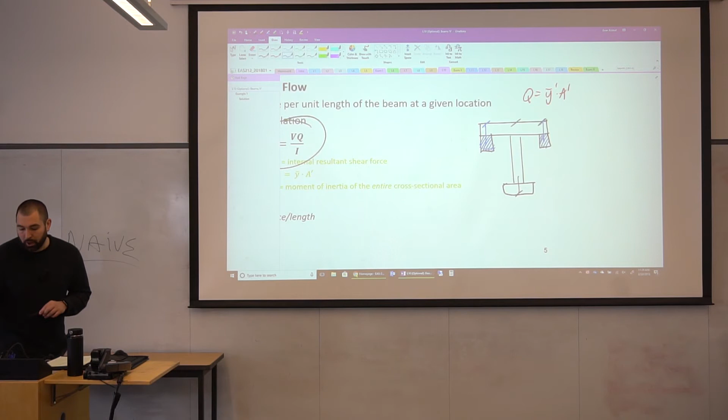Max asks: would we be using the complementary V in the X direction in this case? No, great question. V here is still the transverse, vertical shear force. This is simply causing a shear stress in that longitudinal direction as well, and that's what's driving the desire of the flange and web to move this way. But the actual demand V you get from your shear and moment diagram is the same exact V you'd use for shear stress.

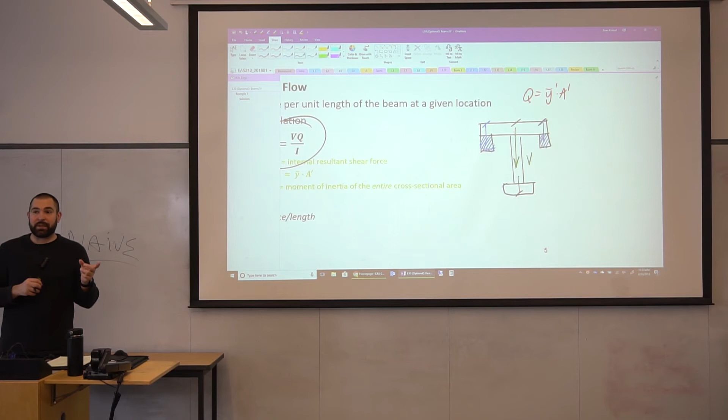Now, there are extensions of this shear flow into topics we wouldn't even get to even if we had time in the class, things like shear center. All of our cross sections that we deal with so far for shear have to be symmetric about the axis that V is acting in, and we won't deal with any that aren't, but I do want to give you a heads up.

When we have a cross section that's not symmetric, let's say like a channel, and I have some shear force applied to it like this, now the section is not symmetric about the application of the shear force, which we can't deal with. But what's the issue if this shear force is applied at like the geometric center of this shape? What ends up happening is if it's not going through what's called the shear center, it causes a torque on this cross section as well.

Being able to calculate how far we are from the shear center is an extension of this shear flow concept, where we plot out how the shear flow varies, not just the connections, but everywhere in the cross section. We plot it out, then find the centroid of that shear flow area, which tells us where the actual shear center is, which is not the geometric center, just to be clear. That's another more advanced topic. They kind of go hand in hand, and we always have to cut short, usually between shear flow and shear center, but this time we're just cutting short of shear flow.

But I will give you a lecture online and give you some extra credit if you want to investigate that a little bit further. Yeah, Max?

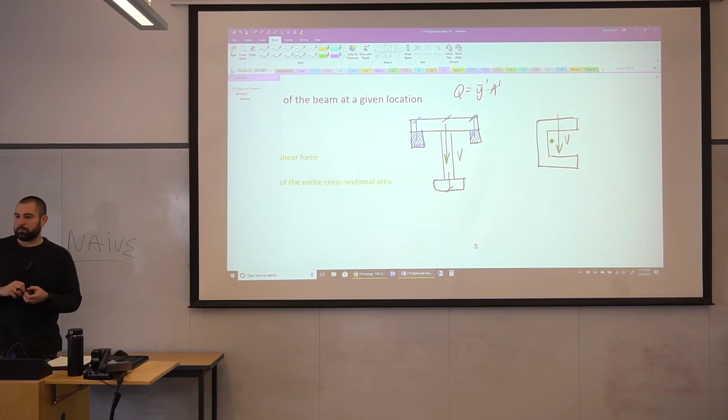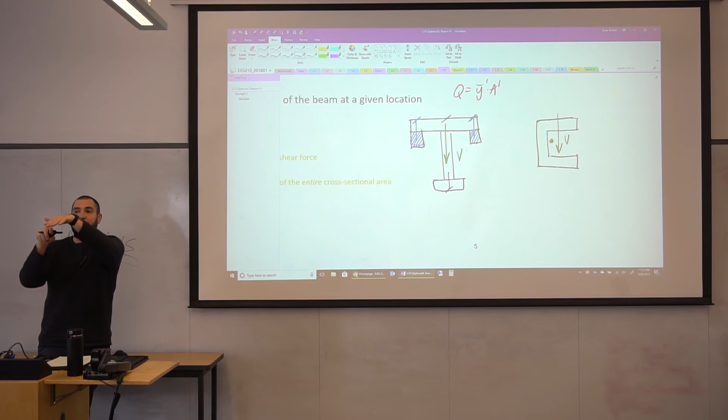Max asks: just to clarify, using this method, is it going to define the shear flow in the x direction? In the longitudinal direction, exactly right. The forces we care about here are going in and out of the page, trying to load this nail right here. It's trying to make that break this way. It doesn't care how much this little block weighs or whether it's going to fall off. It's not loading the nail in axial like tension. It's loading it this way, like the nail is going to break side to side.

So that's one thing. Like I said, I'll provide some supplemental material, an opportunity for some extra credit, but we're not going to cover it for the exams or the recommended problems. I've already updated the recommended problems for that.

The other thing that we're going to skip over, which again is a very quick calculation, is thin-walled pressure vessels. All I want to do is give you a quick heads up about what this looks like. We use a lot of pressure vessels for liquid storage, gas storage, things like that. We need to figure out how thick that metal or plastic or whatever else needs to be. And not surprisingly, if I have a differential pressure of the inside of the vessel versus the outside, I'm going to get some stress in whatever that wall is.

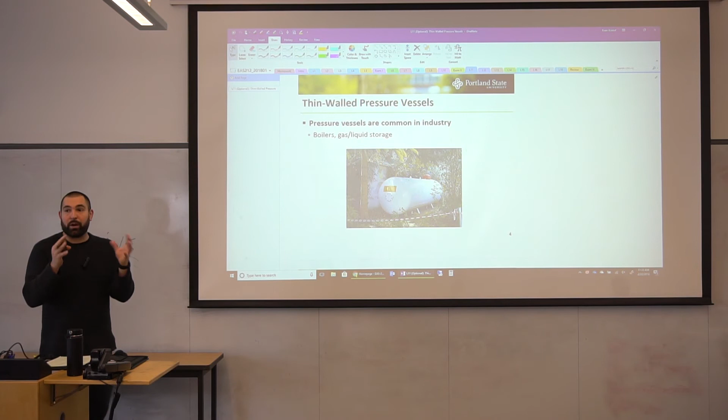All that we do is split it up into two different shapes: cylindrical vessels and spherical vessels, and that's the only two that we get to deal with. And we're limited to just thin-walled pressure vessels, meaning the inner radius divided by the thickness has to be greater than or equal to 10.

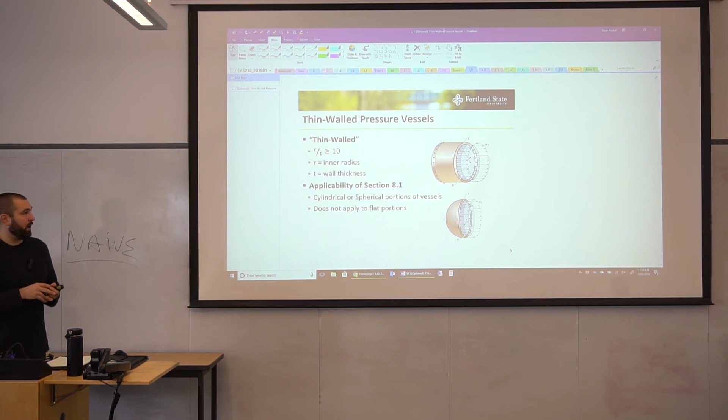There are thick-walled pressure vessels. We don't have the equations to deal with that in our textbook, but they do exist. This is a really short section in your book, and basically there's only two different stresses that we care about.

One is called a hoop stress, which is going transverse to the longitudinal axis of the member. It's basically going in the circumferential direction around the cylinder. And the other one is called longitudinal, going parallel to the longitudinal axis of the vessel.

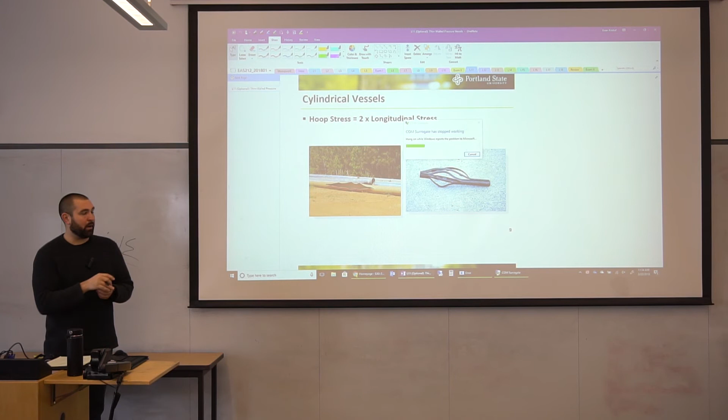Spherical vessels, it's the same idea. The only difference is that instead of getting a hoop stress and a longitudinal stress, the only stress that we get is the same in every direction for a sphere. We call it sigma 2. And the equations are relatively straightforward to apply.

It's the pressure times the radius, either divided by twice the thickness or 1 times the thickness. They're exactly the same whether it's hoop or spherical. It's just we divide by 2t or we divide by t. Just internal pressure, internal radius, and thickness are all the things that you need.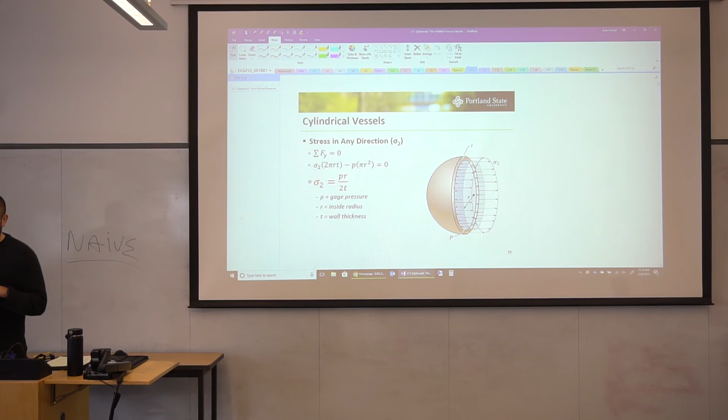So it's really quick to apply. It doesn't really deserve a whole lecture unto itself, and we're going to skip over that as well too. Just like the other material, I'll provide a quick small homework assignment for some extra credit for this as well too. But your book doesn't devote a lot of time. We're not going to spend a lot of time on it either. Actually, we're gonna spend like no time on it other than this, just to kind of introduce it.

But where this takes us is the topic that we were talking about at the beginning of class, which is combined loading. We know how to deal with the normal force and what kind of stresses it produces, torsional moment from chapter 5 and the stresses it produces, bending moment from chapter 6 and the stresses that it produces, and now shear forces and the stresses it produces from chapter 7.

What happens when we have multiple loadings on the cross-section acting at the same time? That's what chapter 8.2 in your book is all about. And that's a really good review of all the loadings that we've dealt with before, all together. We have a lot of structures that have multiple internal resultants acting at the same time. We don't live in a vacuum where we only get N or T or M or V acting at the same time.

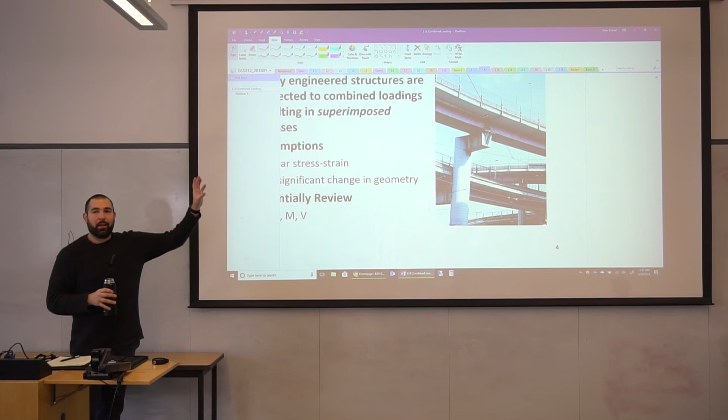So what about this bridge-like column right here? This bridge column, right, most bridges are near and dear to my heart. Is that bridge column subject to N, T, M, or V? Or some combination? What do you think? What is going to cause a normal force on a cross-section of that column?

Dead load, live load, vertical forces transferred from the bridge deck are going to make their way into that column, and it's going to be a normal force because it's perpendicular to a cross-section through it. Great, N is pretty easy.

M - why am I going to get M? Yeah, I have some eccentricity. If I have a force going down like that, there's some eccentricity there. That's going to cause a moment, a bending moment in that column as well too. I could have an earthquake, right, that applies let's say a horizontal force, and that's going to cause a moment as well too.

Am I going to get any torsion possibly on that? Yeah, if the bridge superstructure itself is expanding or contracting, thermal effects, stuff like that, I could get a force parallel to the deck that causes some torsional moment because of the eccentricity to the longitudinal axis, the vertical axis of the column. So I could get a torque there as well too.

This force here is also going to cause a shear force on the column as well. Wind loading, the load of a vehicle braking, the wind load on a vehicle - these are all loads that we have to care about.

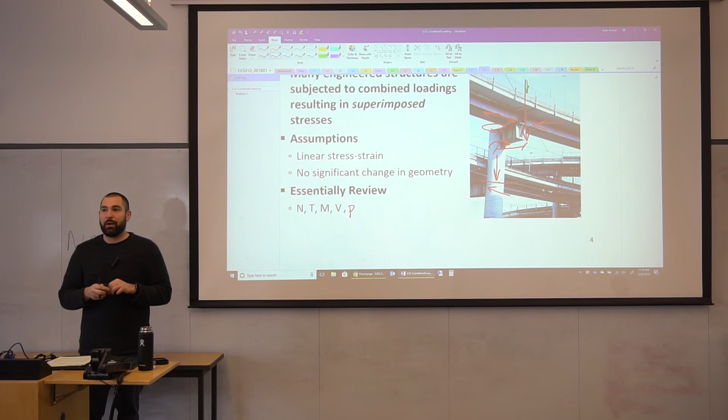So Max is asking, would the normal force cause strain in the concrete? Yeah, once it's cured, absolutely. You would get a composite action then as well.

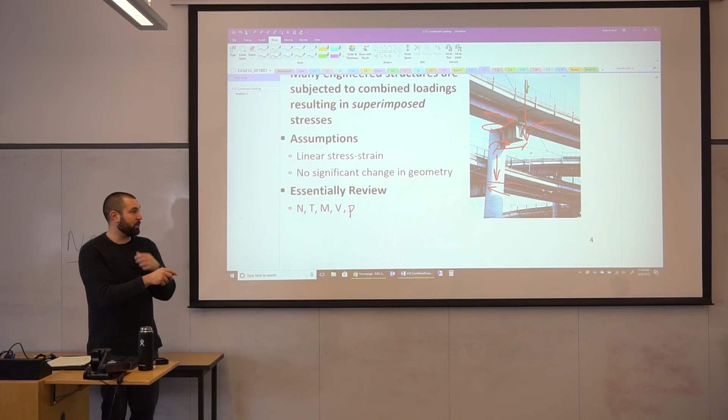So you can see really quickly, for a relatively simple structure, our loading gets to be really complex. So it's all about bookkeeping, figuring out there's even temporal effects as well. If we have pressure before the concrete is cured, then we have a different cross-section to deal with for some of the loads, and we add stiffness. There's even time-dependent properties we have to deal with, but it's all about what are the loads, keeping track of when they're applied, what kind of cross-section they're applied to, and it quickly balloons out of hand - that's why designing something like this can take months if not years.

Okay, so with that in mind, the fundamental procedure for dealing with this is the same as what we've been doing so far. We're just adding everything together. Assuming that everything's linear elastic, we can just superimpose the results at the end.

So we need to figure out our internal loadings - how do I figure out N, T, M, and V? Section cut, free body diagram, equilibrium - that always is going to work. If you have some graphical method shortcuts that you're comfortable with, that's one way to get to it as well, but equilibrium and free body diagrams will always get you there, or it might be given to you. But this is step number one: what are the internal resultants?

Step two, what are the stress components? That's each of these equations down here. In the longitudinal direction, this is more important when we dealt with thin-walled pressure vessels - I'm just going to simplify this and say sigma and tau. All that I've done is crossed out the pressure vessel components. I'm going to still let you see them, but we're not going to deal with them on a computational level.

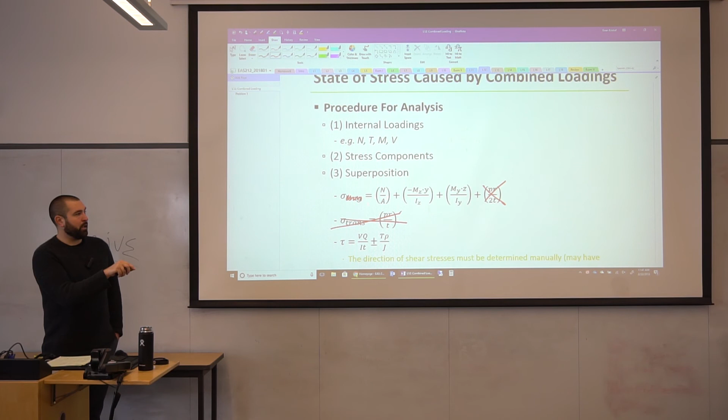What are all of the components for sigma? That could be the normal force N over A, Mz times y over Iz, My times z over Iy, and then add all of those together at a specific point. Same thing for shear: VQ over It, T rho over J. Just keep in mind here we have the plus or minus symbol. For sigma, if I have my coordinate system set up correctly, if I follow my sign conventions, the signs will always work out, where negative means compression, positive means tension. The signs and coordinate systems are set up to make this just an easy way to figure out if it's compression or tension. Just follow the sign convention, it'll work out.

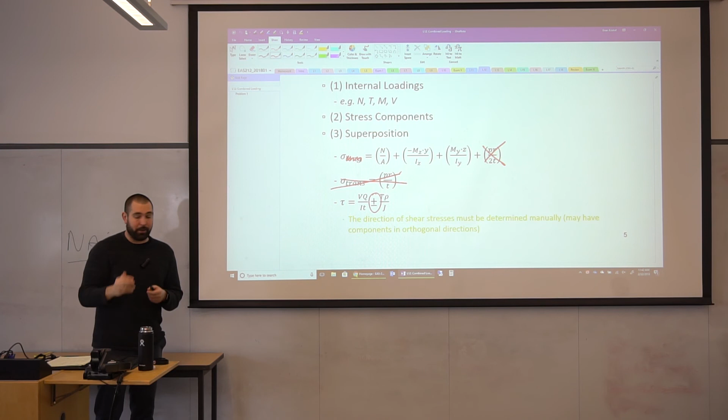For the shear stress, just like we saw with the figures at the beginning of lecture, it's a little bit trickier, right? Sometimes you have shear vectors going this way combined with shear vectors going this way, and you've got to figure out - maybe you go with a vector sum if not parallel, or report each direction of tau separately. And that's really what this note is saying: if you have orthogonal directions, draw a sketch - show me what the stresses look like if they're not going in the same direction.

And that's it for combined loadings. It is: do what you did in chapter 4, 5, 6, and 7, and then add together the results.

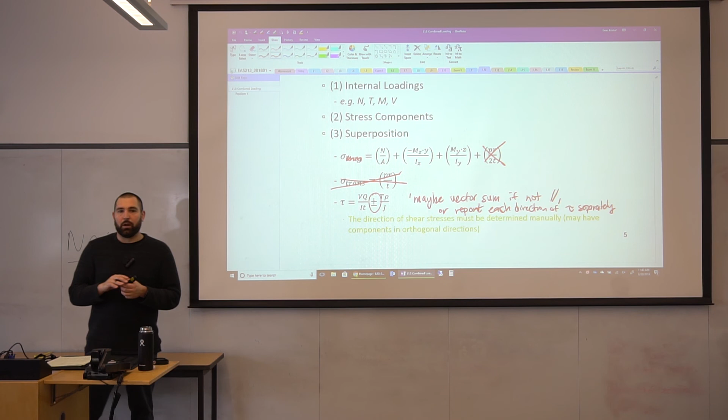It's just a bookkeeping and kind of conceptual graphic exercise, making sure that you're adding them together where they should be added, subtracting them where they should be subtracted, and especially with shear stress, making sure you're identifying what direction the stresses are actually going. It's a good review, and it'll help you with the second exam as well.

Let's talk about your book—it's got some really good examples with many different types of loading that I think will help you out. Examples 8.2 through 8.7 do a really good job of walking through different examples where we might get multiple different loadings on a cross section and how to deal with them individually.

So for example, let's talk conceptually about this one. Here we've got a single point load applied, and it's asking for stresses on a cross section that passes through B and C. Is this an axial load, the 150 pounds?

Axial load is defined by two things. So what do you think an axial load needs to be? It needs to be parallel to the longitudinal axis. So far so good, the 150 is parallel to the longitudinal axis. And it needs to be what? Yeah, at the centroid of the cross section itself—coincident to the longitudinal axis.

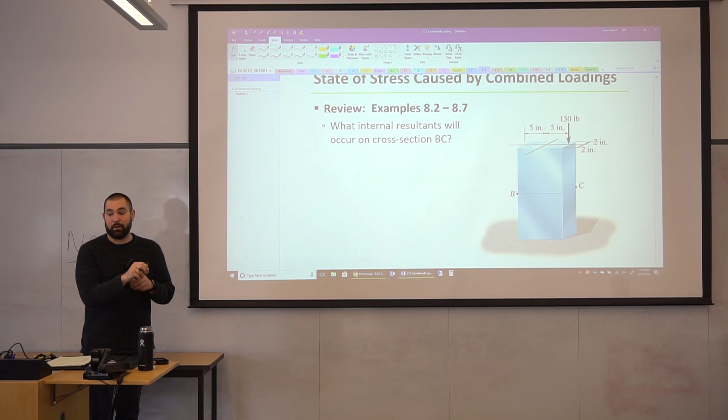Here it's not—it's offset, just like Max said, by 5 inches. We call this an eccentricity. This has an eccentricity from the centroid of 5 inches, meaning it's going to cause what if I made a section cut through here? A moment.

So let's say we're making a section cut through here. I have a possible internal normal force, and a possible internal moment as well. If I run equilibrium, I'm just going to make up a coordinate system really quickly—let's call this x, and let's call this y. It doesn't really matter, this is all arbitrary anyway. We'll call counterclockwise positive.

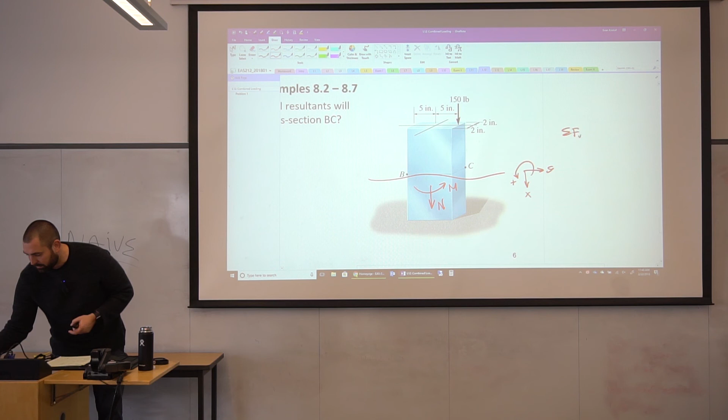All right, sorry about that, we're back on the blue light. So if I sum the forces in the x direction equal to 0, we say that positive x is down—it doesn't make any difference. I get positive 150 pounds going down, that's the applied force, plus N. So N equals negative 150 pounds.

It means it's in compression on this cross section, 150 pounds, which is pretty straightforward. I think almost everybody can get to that point. It's the eccentricity that throws some people for a loop. So when we take the moments about a section cut, we often say we're taking the moments about point O. Point O is at the centroid of that cross section.

Meaning when I sum the moments about point O, counterclockwise being positive here, M is clearly causing a moment about O—this is a couple moment. I can just say that's causing a positive M moment about O. What about the 150 pounds? Is that causing a moment about O? Yes, it's negative—it's going to be causing a clockwise rotation about O because 150 is pointed down on the right, going clockwise, so it'll be negative 150 pounds times 5 inches.

So I get that M equals positive 750 pound inches. As a result, if I cared about this point C right there, what kind of stresses am I going to get due to the normal force? It's all about sigma equals N over A minus Mz times y over Iz. N here is negative, the area is just 4 inches times 10 inches, so it'll be 150 over 40 square inches. Same thing with Mz, y over Iz.